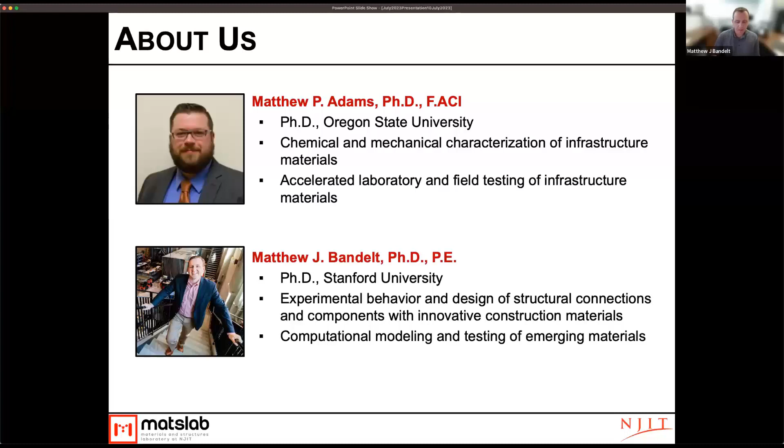Thanks, Matt. And for myself, my background is primarily in structural modeling of new construction materials, and I do that both through experimental testing as well as computational methods.

Our laboratory is located at New Jersey Institute of Technology. We have quite a bit of physical laboratory space where we do physical testing of construction materials and structural systems. We have an advanced analytical space as well, where we do material characterization work, looking at concrete and similar construction materials under the microscope for advanced analytical work. We also have additional space where we do basic mortar testing and mechanical properties testing of different systems. So this is just a brief overview of our laboratory.

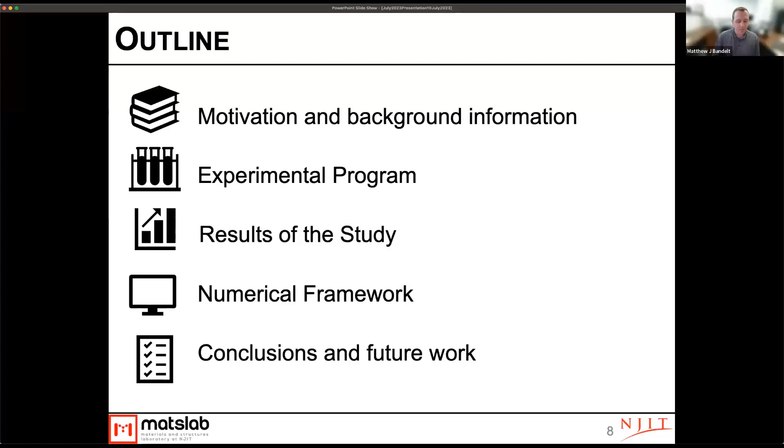The outline for today's talk: first we'll give you a background and some motivation for this project. Matt will then present the next two areas, the experimental program and the results of the study. Then I'll follow with some numerical modeling we've done that showcases the long-term durability of the materials we studied in this project. And then we'll move on to conclusions and future work.

In terms of motivation and background, if you work in the transportation sector and specifically with concrete, you're familiar with some of the durability issues that concrete materials face, predominantly corrosion, shrinkage, salt scaling, freeze thaw, among a number of others. These are a range of durability issues we face, especially here in the Northeast, due to the local climate, the large scale of these materials, the way we have to treat them, et cetera.

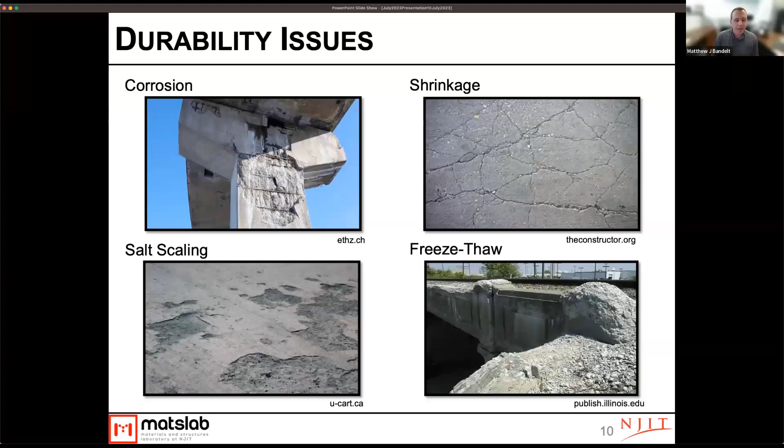All of these durability issues are in one form or another due to some sort of deterioration mechanism. If we think about drying shrinkage, for example, that happens due to moisture loss and moving water in and out of concrete. Salt scaling mechanisms are somewhat similar in the sense that de-icing salts increase the number of freeze-thaw cycles, which causes pressure to build up and local cracking and delaminations to occur.

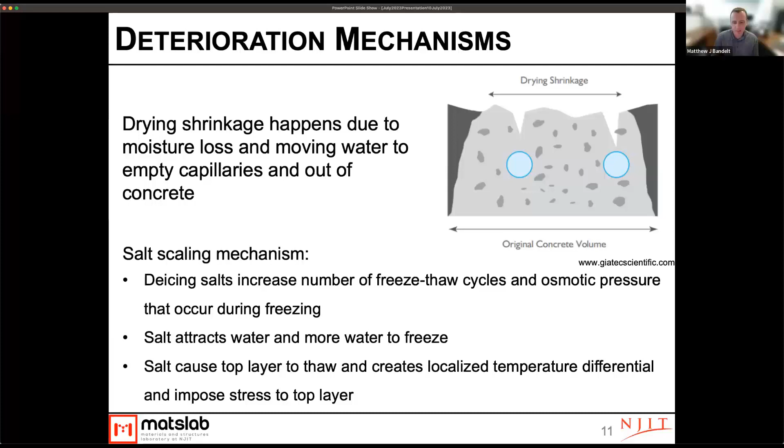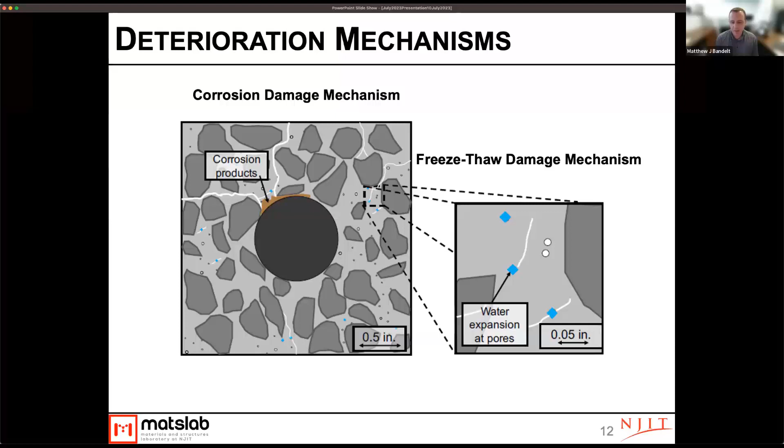If you think about the different types of deterioration we see in concrete structures, a lot of them are due to expansive stresses that build up across different scales. If corrosion products form around the surface of reinforcing steel, those products have a larger volume than the surrounding initial material, causing expansive stresses to occur. A similar phenomenon happens with freeze thaw, where water expansion within pores causes cracking at a different scale.

What we studied within our project are what I'll generally classify here as ductile concrete materials. There have been a range of these developed over the last 20 to 30 years. The most common, which a lot of people have heard of recently, is ultra high performance concrete. But there are others that different states and transportation agencies have looked at. In this project, we looked at a few different ductile concrete materials, where basically all of them exhibit some sort of either plastic or strain hardening response in direct tension. Each of these materials comes at a different cost, with different resulting mechanical properties and different durability properties as well. In compression, they generally don't spall, so you get really good confinement on the compression side too.

The names of the three materials we looked at were first, ultra high performance concrete, which has very high compressive strength and tensile strength as well. We looked at a system called engineered cementitious composites, denoted as ECC, and we also looked at a hybrid fiber reinforced concrete. I'll explain what goes into each of these systems in a second, but the point is that each of them gives you different levels of mechanical performance and durability performance, and they might suit the needs of a particular project in a different manner.

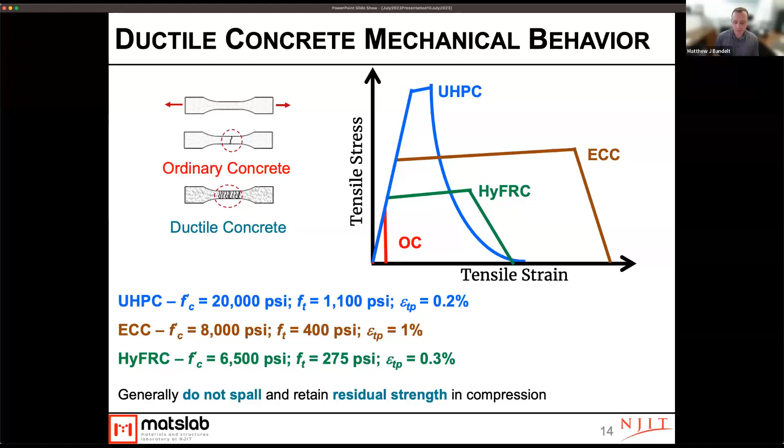So while this gives us potential improvements from a structural engineering perspective, it also gives us significant potential benefits on the durability related side as well.

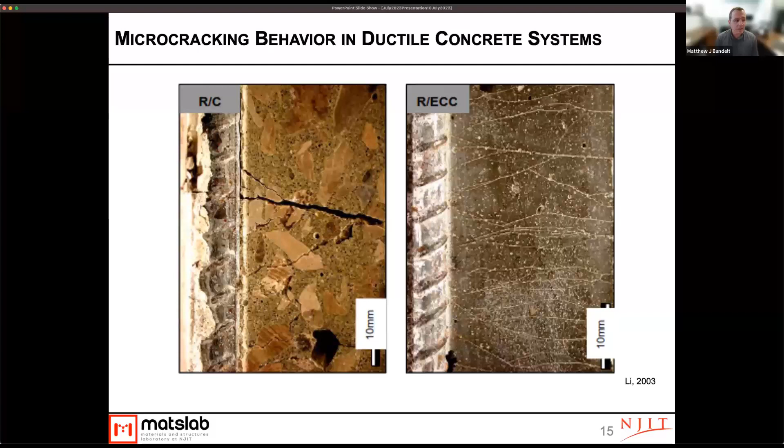The different systems that we looked at in this project were ultra high performance concrete, engineered cementitious composites, and hybrid fiber reinforced concretes. The UHPC system had a very high binder content, did not use coarse aggregate, and used steel fibers at a volume percentage of 2% by volume.

The engineered cementitious composite was a system developed primarily in Michigan by a professor at University of Michigan named Professor Victor Li. The system we looked at used polymeric fibers. It also had a mortar matrix and had 2% by volume polymeric fibers. The particular polymer we worked with were PVA fibers.

The last system we looked at was called a hybrid fiber reinforced concrete, and this has mechanical properties probably closest to a traditional concrete system in the sense that we're using coarse aggregate. This is called a hybrid system because it uses a hybridization of larger steel fibers and smaller polymeric fibers at a combined percentage of 2%. I think the steel fibers were at 1.8% and the polymeric fibers were at 0.2%. But this gives you a sense of the different systems we were looking at.

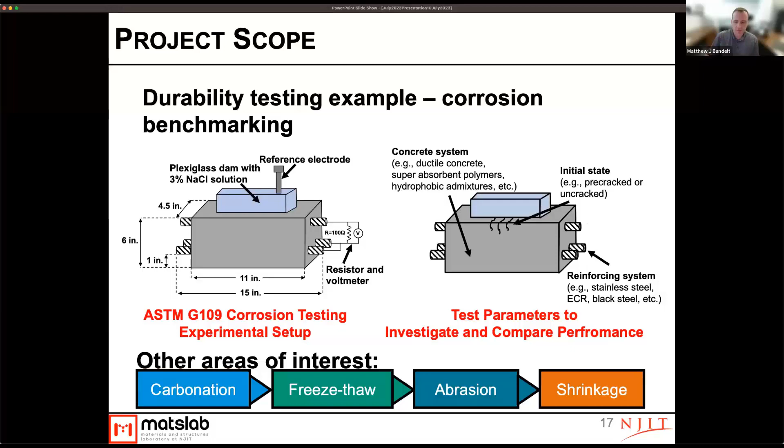Some other areas of interest we looked at were: if you were to place one of these materials in a bridge deck, what would be the long-term durability performance? The way we did that was using a numerical modeling system combining the effects of both mechanical cracking behavior and chloride ingress and corrosion. We'll walk through that numerical simulation framework and some specific examples.

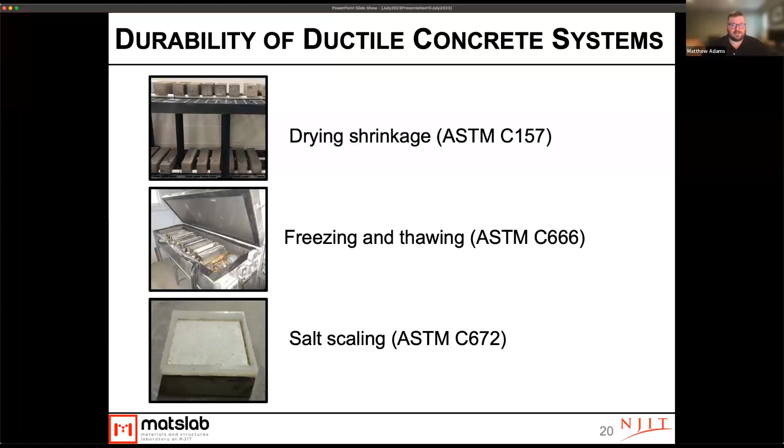So, like we said, I'm going to talk about our experimental program a bit. We looked at a range of durability tests to try to benchmark the difference between these 3 different materials and some existing mixtures used by NJDOT. So we looked at drying shrinkage, freezing and thawing, and salt scaling of these systems.

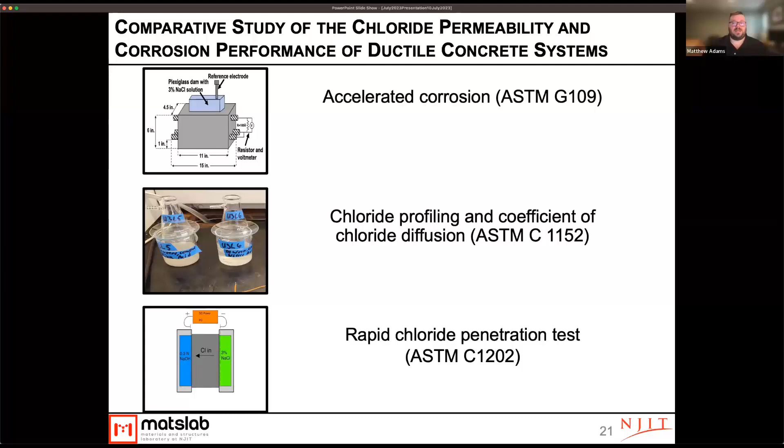We also did a range of tests to look at the corrosion performance of these systems. We did some accelerated corrosion testing through the ASTM G109 test, chloride profiling to measure the coefficient of chloride diffusion, and the rapid chloride penetration test. This is a quick test method used as a surrogate for how quickly salts can penetrate through concrete to reach steel. However, it's well designed for ordinary concrete, but there are questions about its applicability for some of these more ductile systems. We'll talk about all of these moving forward.

For our concrete materials, we used 2 ordinary concrete systems: a self-consolidating concrete and a high-performance concrete. These were both based off standard mixture designs used here in New Jersey. We also used 3 ductile concrete systems: the ECC, HyFRC, and UHPC.

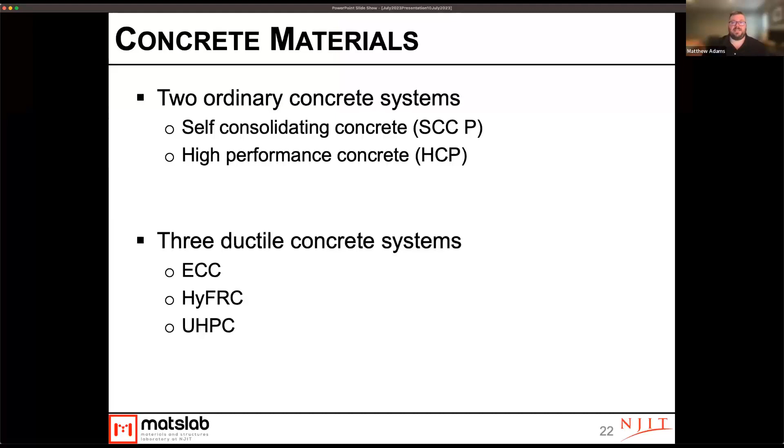We also looked at 5 different types of reinforcement materials in the G109 test. And we also took a set of epoxy-coated reinforcement and pre-damaged them by breaking off a bit of the epoxy coating, to simulate the performance of those materials in the field, where epoxy coating, while it works great when it stays on, is a little more prone to damage, which can really impact performance.

So here are our results from this study. First, I want to talk about some of our fresh and hardened properties and the air content. Our strengths were all in relatively the same area for everything except the UHPC. The UHPC was a bagged product we got from Lafarge, and that strength was up above 20,000 PSI, but everything else was in the 5,000 to 8,000 PSI range. So you can really see the big difference in the compressive strength of those systems.

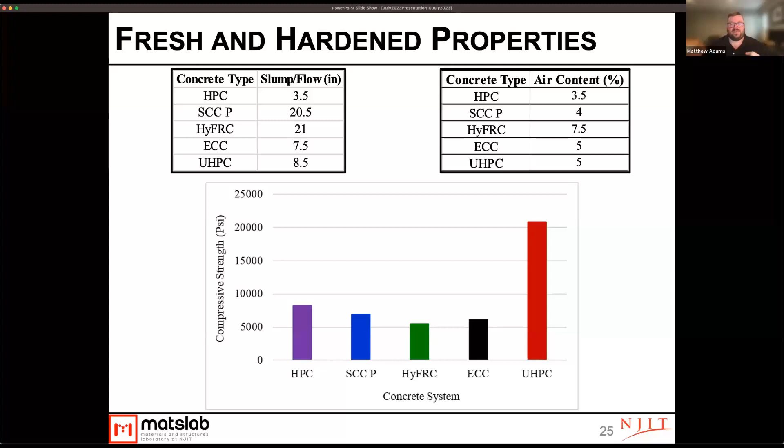The big thing I want to note here is, particularly for the HPC and SCC, we had relatively low air contents. We really had trouble air entraining these mixtures in the lab. If you're familiar with labcrete versus field concrete, air entrainment is really a bear to get right in the lab. Unfortunately this was done during COVID, and we should have switched to a different air entrainer to get better air entrainment, but procuring materials during the height of COVID was basically impossible most of the time. So keep those air contents in mind, because they do affect some of our results, and we hope to someday rerun some of these tests for freeze-thaw damage.

So first, let's talk about drying shrinkage. Of course, for drying shrinkage you take a bar of concrete, place it after curing into a drying environment, and measure its length as it loses water, which gives you an idea of the shrinkage. In this test, the UHPC had the lowest shrinkage, while the HyFRC and ECC both had the highest levels of shrinkage, and the ordinary concrete was in between.

So what we can see here is that these ductile concretes do tend to have a little more shrinkage, except for the UHPC. But one thing to note is that even though those levels of shrinkage are higher, generally due to the high cement contents, the test method we used, ASTM C157, does not necessarily measure cracking propensity - it's just measuring free shrinkage, with no restraint in the system. Other research has shown that these ductile concretes, while they shrink a bit more, also tend to crack less because of the fiber content.

And in this test method, the UHPC showed the lowest drying shrinkage. But this test method also doesn't capture autogenous shrinkage, which is typically a bigger shrinkage issue for UHPC than drying shrinkage is.

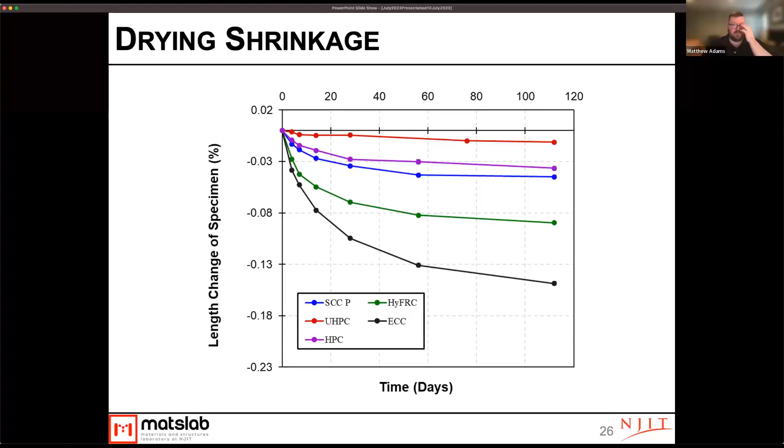But of course, when you use those fibers, you'll hold everything together, so you could get less ingress.

For freeze-thaw, our two ordinary concrete systems, the SCCP and the HPC, both failed fairly early on. But again, with those systems we had a lot of trouble getting air entraining in, so this makes sense—the air entrainment was really quite low for those. The HyFRC also failed despite having 7.5% air content, which shows that HyFRC may not be the best choice in freeze-thaw applications.

That may have to do with the certain systems in there, and the different fibers causing more expansion during freeze-thaw, maybe allowing water to get into places that don't have access to the air entrainment. More research really needs to be done to understand why that HyFRC system performed that way. But we do see that the ECC and UHPC, both with moderate levels of air entrainment, only 5%, both performed really well.

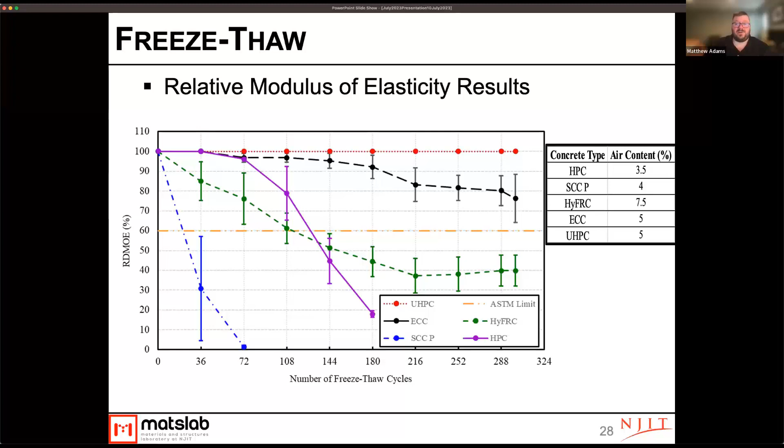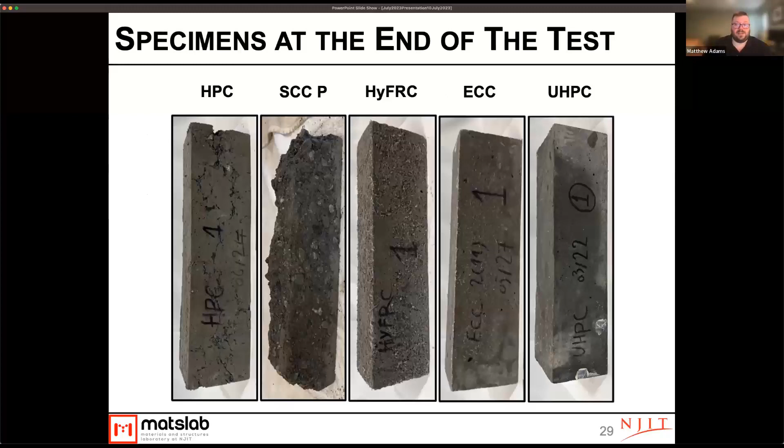So what we know is that our ordinary concrete was difficult to air entrain. Likely these results show that if you don't get enough air entrainment in there, you're definitely not going to get good freeze-thaw performance. Even though that HyFRC did perform poorly, we need to take a look at that a little bit more, but some encouraging results with the ECC and UHPC.

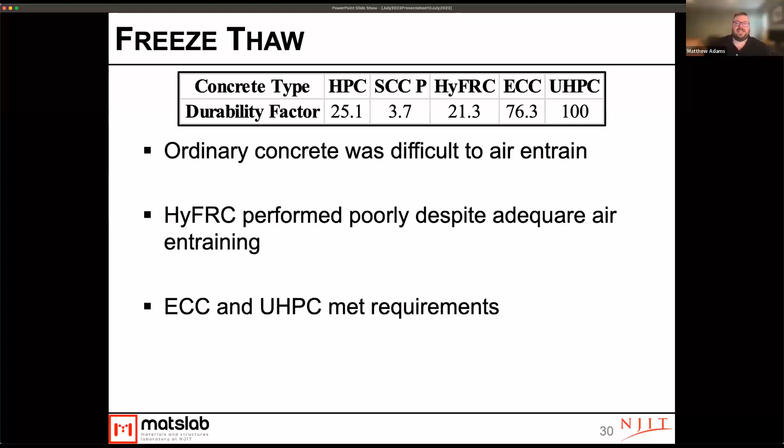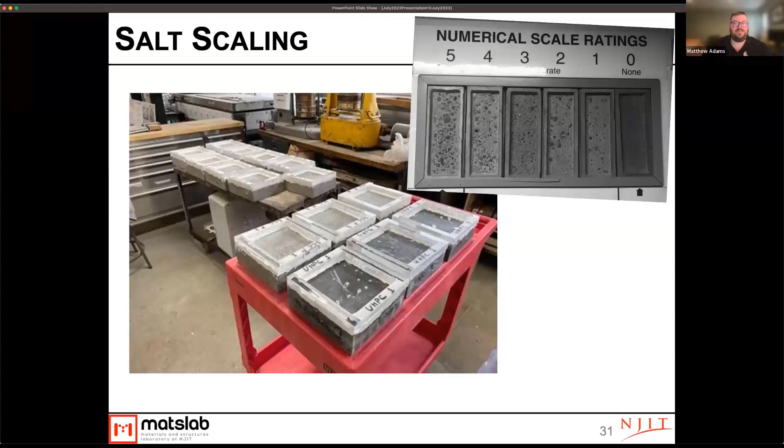Salt scaling is the third of the non-corrosion durability tests we looked at. For this test method, you take a small concrete slab, put a dam around it, and pond it with a chloride solution. This is more of a qualitative test—you look at the damage to the surface over time to determine its resistance to salt scaling.

What we saw was that the SCCP and the HyFRC both had the worst performance in terms of salt scaling. The HPC and ECC both had around a rating of 1, which is good, and the UHPC had essentially no damage noticed on it. Here's what the different samples look like over time.

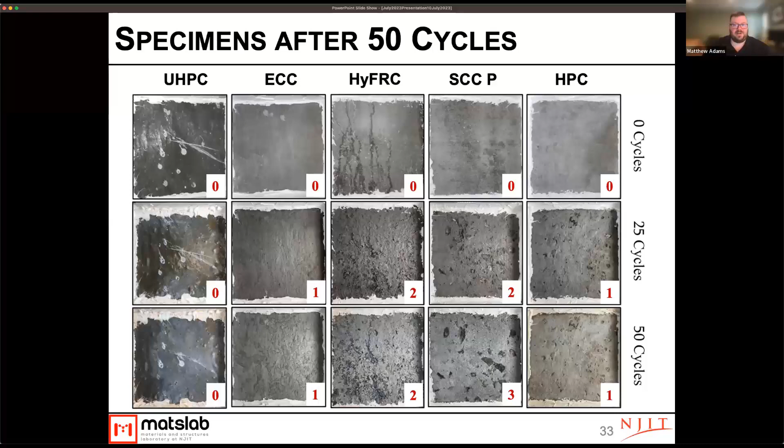Once you get out to 50 cycles—meaning you've put those chlorides on there and actually frozen and thawed it 50 times with that ponding—you can start to see that surface damage build up. Particularly on the normal concrete, you typically get those pocks in the surface. That's very standard damage with salt scaling.

But one thing we noticed with the systems that had fibers is that the fibers tended to hold material on the surface. The test method doesn't actually request that you brush or clean the surface off—you're just supposed to rinse the waste material off and then look at the surface. However, that doesn't really give you a full picture of the damage you're seeing in those slabs.

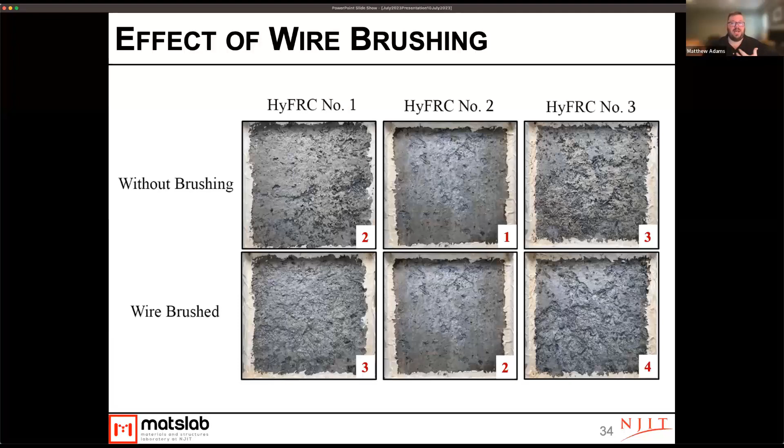So we recommend that if you are testing these fiber reinforced systems in salt scaling, you do a light wire brushing of the surface to clean off some of those materials stuck on with the fibers, because they may actually be a trip or skid hazard, particularly for walkers, if they're stuck on there but not really tightly held.

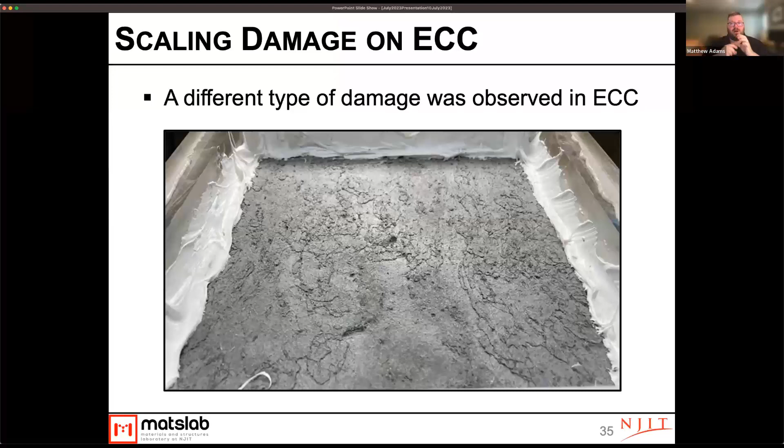On the ECC system, we actually noticed a slightly different type of damage. Instead of small pocks, we got sort of larger delaminations. This is likely due to the density of the fibers in that system holding those surface pieces together, so you get thin delaminations across a larger area rather than small individual pocks coming off.

So the takeaways of our durability testing: UHPC across the board had the best performance. In general, the ductile concrete systems had improved durability, though the HyFRC was a little bit questionable.

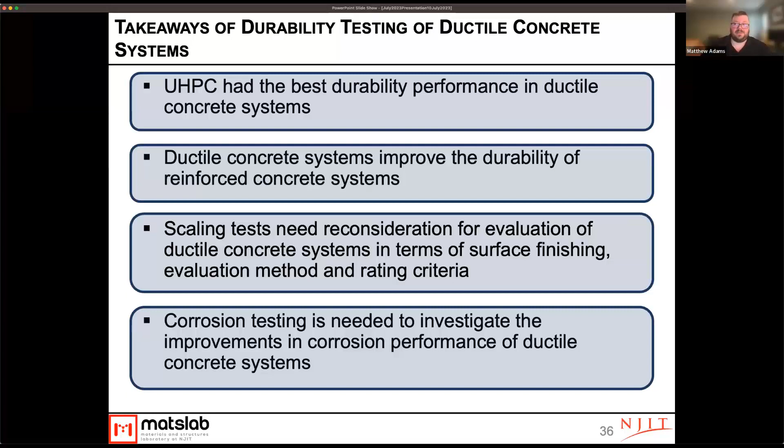And we have some testing method modifications that need to be considered when we're looking at these ductile fiber reinforced systems. So next, I want to get into the corrosion testing.

One of the first things we started running were these G109 corrosion tests, and Matt talked about this a little bit. This is essentially an accelerated corrosion test where you apply a dam at the top of a reinforced prism. In that dam, you have a chloride solution that you put on for 2 weeks at a time, allowing it to stay wet and then drying it. This helps accelerate the rate at which those chlorides move into the system.

Then we measure the corrosion current density along the rebar, which tells us when corrosion has likely occurred. The normal test method does not have you apply any preloading to develop cracks. However, with these ductile systems, and even with normal concrete, you often don't see any damage, as you'll see from our results over a year, even 2 or 3 years time.

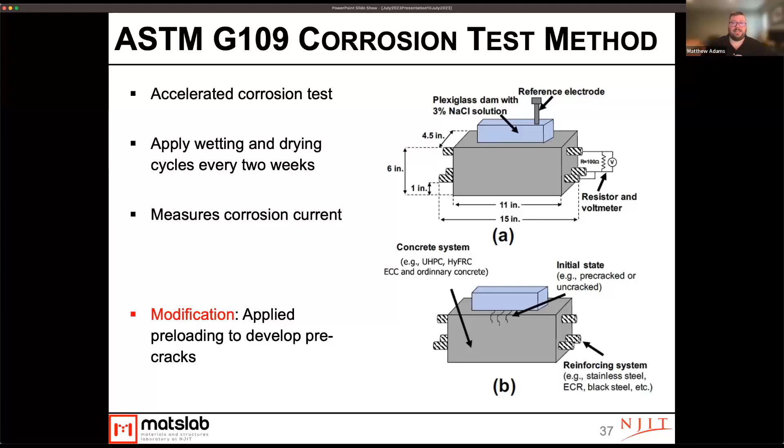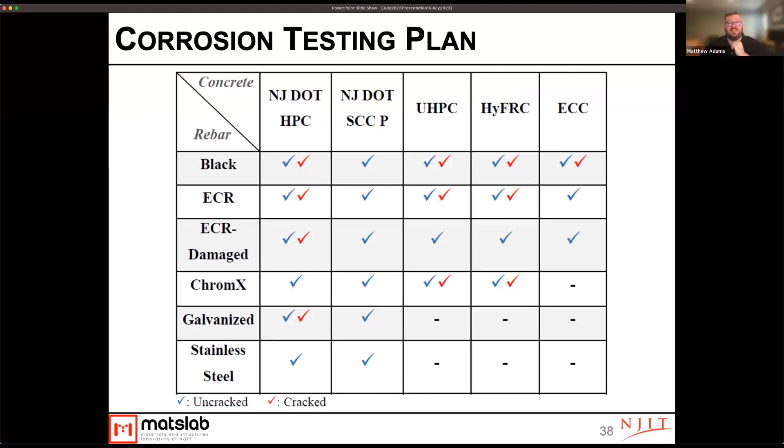So to try to accelerate that and show more realistic field situations where you have some initial pre-cracking, either from loading or shrinkage, we looked at a modified version where we pre-cracked the systems. We examined this across all 5 of our concrete mixtures and across different rebar types, including some damaged epoxy coated rebar. All of our systems we did in an uncracked state, and some we did in a cracked state as well, to examine the role of cracking.

What we noticed is that across the board on our uncracked specimens, up to 700 days, about 2 years, we have not seen corrosion begin on any of these samples. We're still monitoring these; they're still in the lab. This is why this test method tends to be a little slower, it certainly was longer than the project before we're going to see anything. This is why it was important for us to look at some cracked specimens.

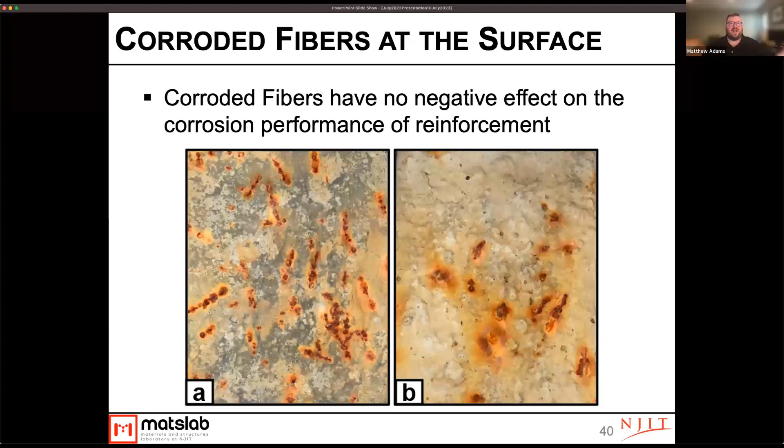We do see some corrosion in the fibers, the metal fibers at the surface. This is typical. However, this doesn't necessarily mean that corrosion has moved through the system—these are just fibers that were already exposed at the surface.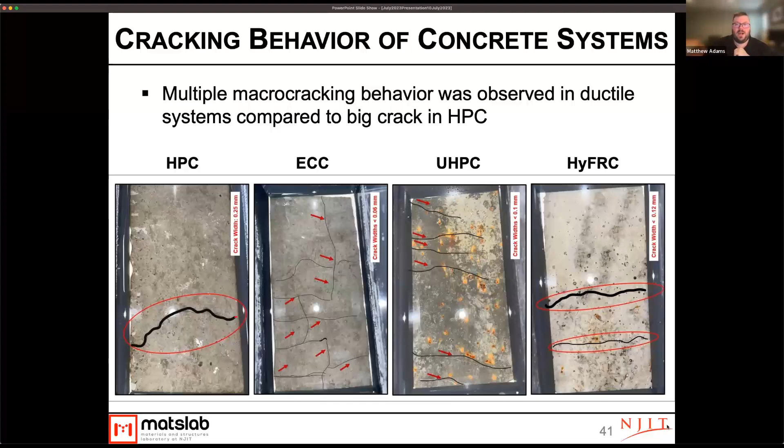And then these are our systems after we cracked them. You can see for the HPC system, we get one large crack, whereas for the ductile concretes, we tend to get a more distributed cracking pattern with smaller cracks.

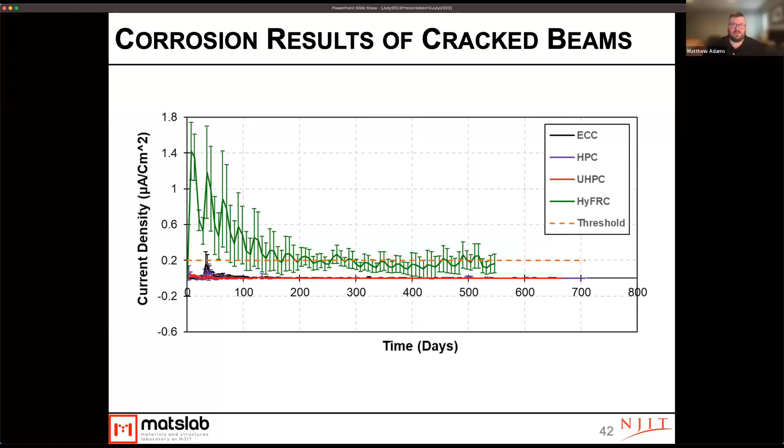What we see here is that above that orange dashed line typically means corrosion may have occurred—if our corrosion current density is above that, corrosion is likely to have started. The only system that we started to see corrosion in our cracked beams, out to 700 days, was the HyFRC system. We actually had to stop that test just after 500 days. But we did see that corrosion was likely to have started in the HyFRC system. Even our HPC system, the normal concrete, which is a standard mix used by the New Jersey DOT, is performing quite well in terms of corrosion performance.

What we see here in particular is that one of the three specimens had a higher corrosion density than the other two, and this was the one with the largest crack in it as well.

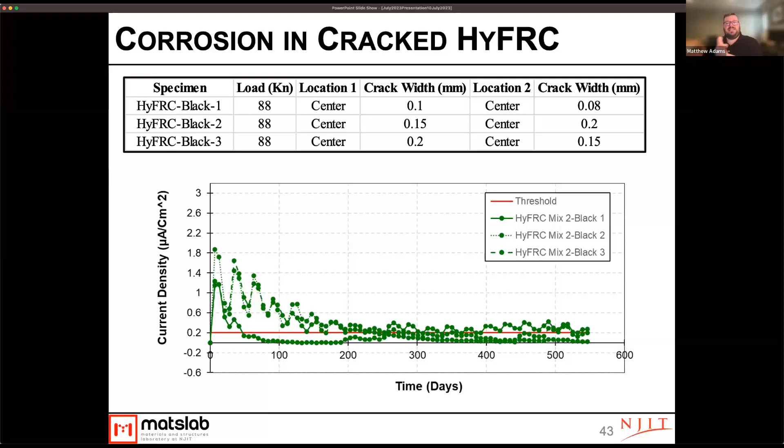We also see some higher corrosion density early on. This is an artifact of the test method—as the system saturates with water over time, at early age you tend to see some higher corrosion density. But what we're really concerned with is the long-term corrosion density.

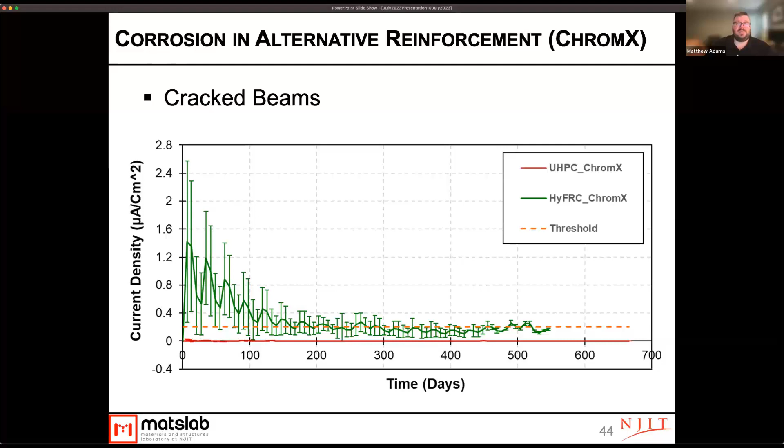For our alternative reinforcements, we see that again the HyFRC, even with the ChromX rebar, had a corrosion density above the limit there, so likely even that ChromX was starting to corrode. Again, that was a system with a fairly large crack. But in our other cracked beams with alternative reinforcement, we still weren't seeing any corrosion.

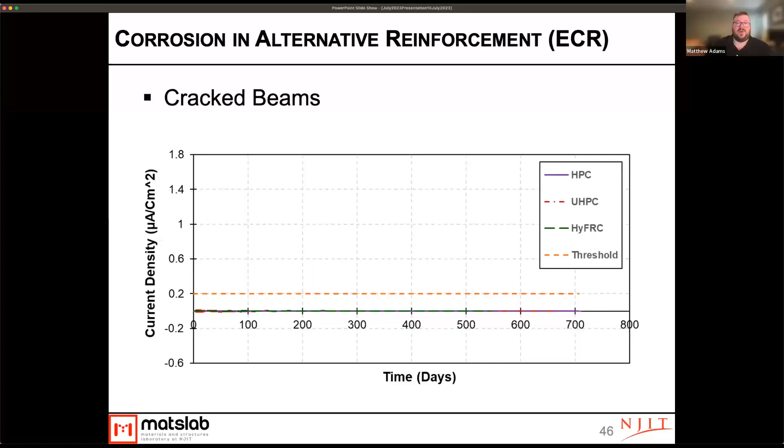We also did some chloride profile measurements. Basically what this is showing us is the depth of the concrete along the x-axis and the amount of chloride by mass of concrete along the y-axis. As you go deeper, you tend to get less chloride in that system because it takes longer for those chlorides to get down to that depth.

This was done at a year of ponding in that G109 test. With the UHPC system, those chlorides got basically nowhere. There was a little bit on the surface, but once you get about 2 or 3 millimeters deep, we had no chlorides. The ECC system had a much higher chloride rate early on, but it quickly dives off. Our rebar was at 25 millimeters, so really only the HyFRC was close to having measurable chlorides at that level.

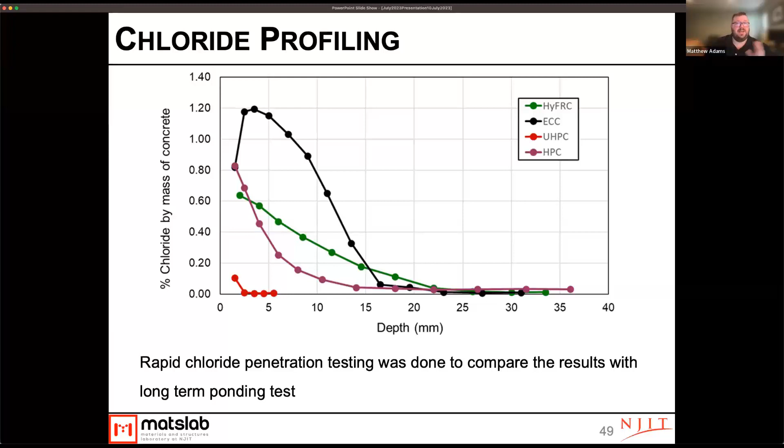So really all of these systems were performing well, though for bang for your buck, the HPC and the HyFRC, or the ECC, were performing the best in terms of the depth where we had our rebar. The UHPC, again, performed the best, but is also quite a bit more expensive.

One thing we wanted to take a look at is the rapid chloride penetration test. As I mentioned, this is a test that's often used because it's quick. Typically what we look at is the amount of charge that gets passed across a concrete sample, and that's related to how likely it is that chlorides will move through that system in a way to cause corrosion.

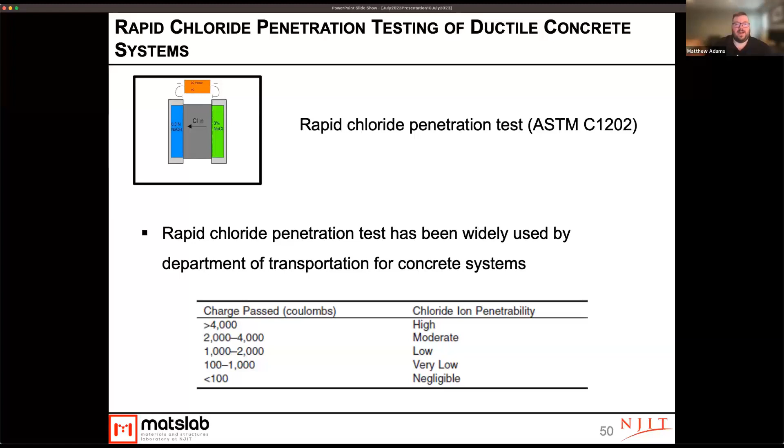Once you're getting above about 2,000 coulombs passed, that's when you really need to start worrying about corrosion possibly happening in your system at an early age. So one thing we looked at was whether using the fibers in these mixtures would impact the test method. Remember, this test method isn't actually passing chlorides through the system, it's just passing charge. Electrons are much smaller than full chloride ions, so it's just a surrogate test, not an exact measurement.

That relationship has been established quite well with ordinary concrete, so it's a great test to use on HPC and SCC mixtures. For our systems with fibers, it may not actually work well, and the cementitious microstructural system is also different.

So what we do see is that our systems with fibers, particularly the ECC, had a fairly high charge passed with the fibers, and even with the UHPC, we see about 10 times the charge passed than when we didn't have fibers. The HyFRC system, which has metal fibers in it as well, we couldn't even get a read on it because it was passing so much charge through that network of metal fibers.

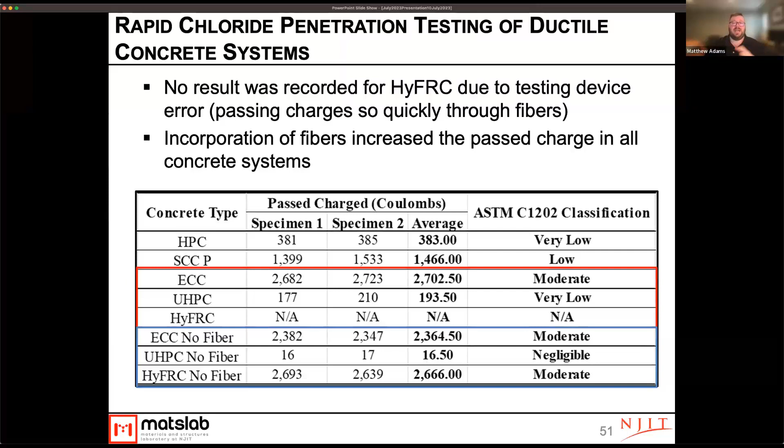With the HyFRC, you absolutely cannot use this test method for measuring chloride performance with the fibers in it. However, both the ECC and HyFRC showed fairly high charges passed, above 2,000 coulombs, but that doesn't match well with our profiling testing and our G109 testing. So it's pretty clear the RCPT test is not really a great measure of chloride performance with these ductile concrete systems. More understanding is needed to recalibrate that test method.

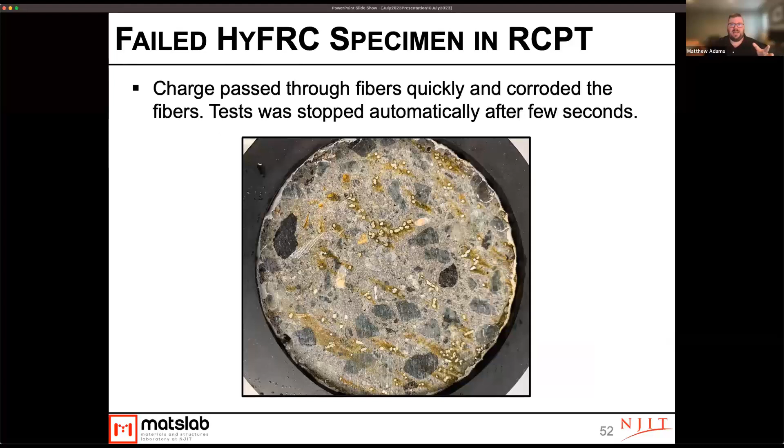Here you can see the HyFRC system with the fibers still installed, and those fibers have basically corroded in that test method, which is only about 6 hours long. It started to corrode them immediately, and we basically had to stop the test after a few seconds because so much charge was being passed in that system.

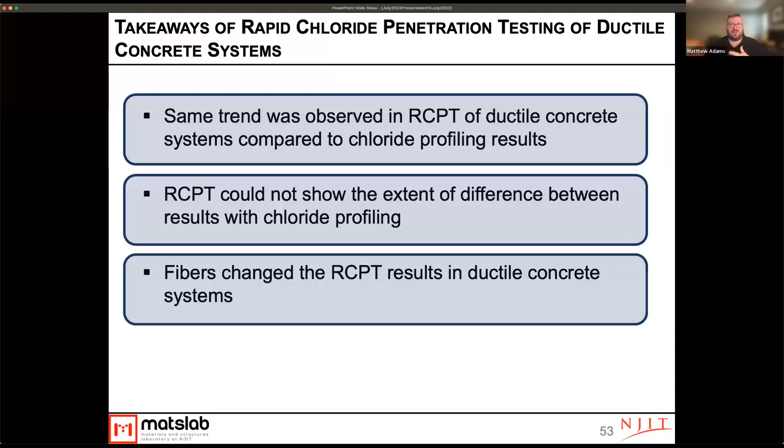So in general, we did see the same trends, but the fibers can have an impact, and we really need to understand these systems long-term to get more information on how RCPT can be used.

Basically, there are two ways to evaluate service life. There's an experimental way, which is some of the things that Matt just talked about. When we use experimental methods, we can get accurate results, and they're fairly intuitive. You can figure out why something went wrong, what might be the cause, et cetera.

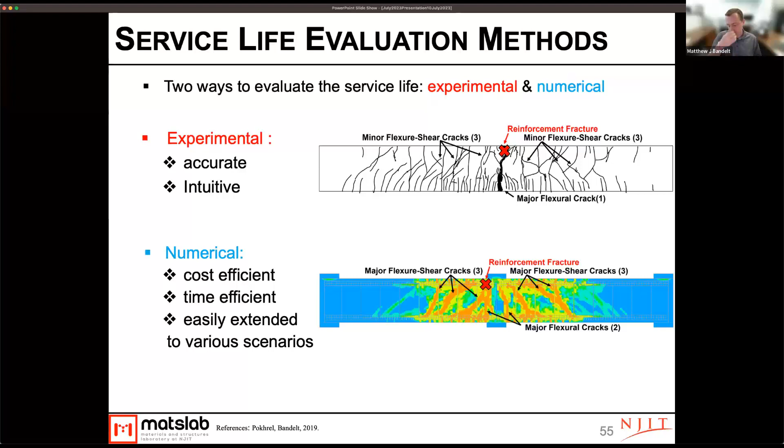And then there's a numerical framework as well. Here I'm showing a structural test on top of something that was physically tested versus numerically simulated. A numerical simulation has advantages and disadvantages. It's cost efficient, since we don't have to actually procure the materials we're using. It's time efficient, once a simulation is set up, we can simulate mechanical loading or durability conditioning in a much smaller time frame. And it's easily extended to various scenarios, we can move loads around, or think about different boundary conditions for temperature cycling, chloride exposure, or whatever it might be.

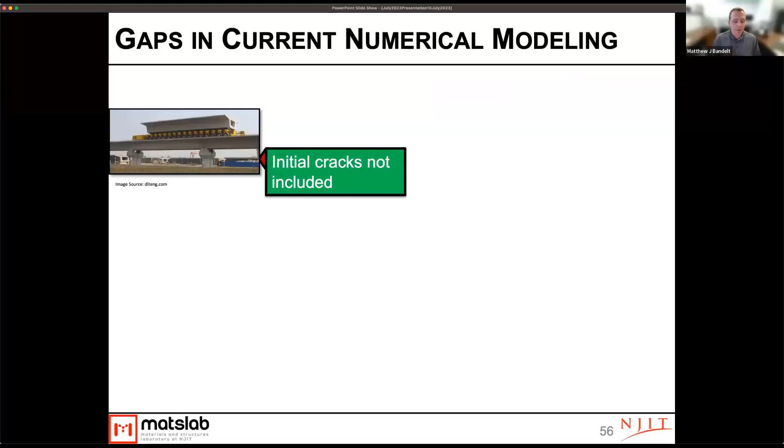But there are some gaps in current numerical modeling. Oftentimes our numerical methods don't include the effects of cracking, and here I'm particularly talking about simulating deterioration. Often that's done without considering the effects of cracking. Sometimes we also don't simulate boundary conditions properly, or they're not updated on a regular basis.

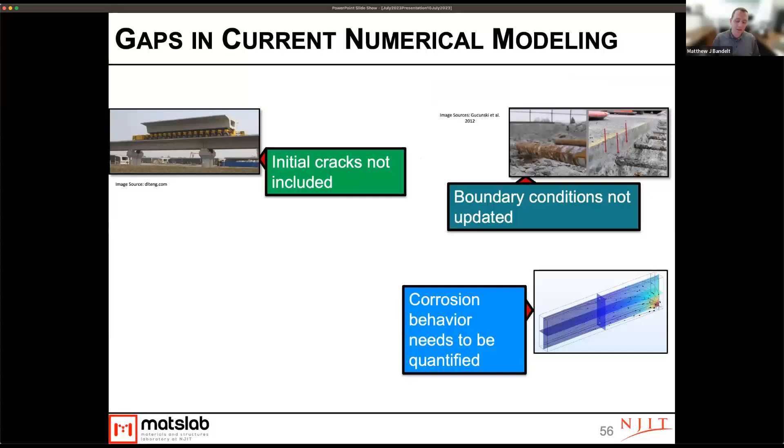One thing we would like to be able to do with numerical methods is combine the effects of mechanical loading with being able to simulate, say, corrosion behavior or some other phenomenon. Oftentimes the big gap is that structural deterioration is not coupled with the environmental conditioning and the resulting deterioration that we see.

So what we set out to do was combine these things and develop a framework that allowed us to simulate both mechanical damage and durability damage in a combined framework. We applied it specifically to one type of material and looked at a case study example so you could see what might be the long-term performance of a bridge deck made of two different types of systems.

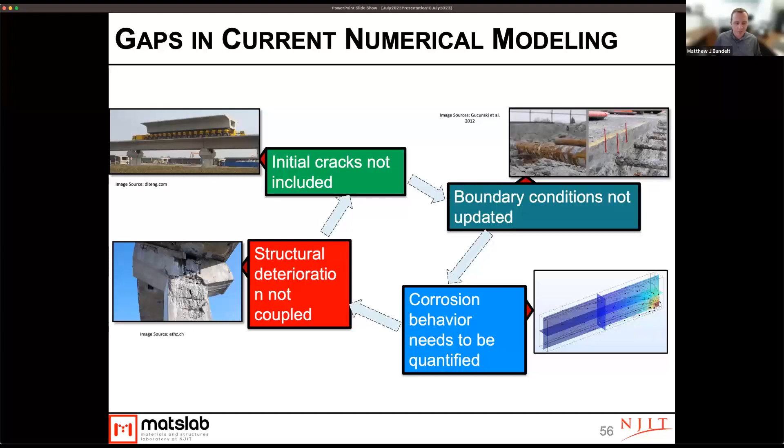Once again, testing and simulation standards often treat each form of damage in isolation. For example, we often think of a truck driving over a bridge deck, and maybe over a long time you get some fatigue cracking or whatever it might be. Then we think of corrosion mechanisms or freeze-thaw or whatever durability issue we might have as another isolated manner.

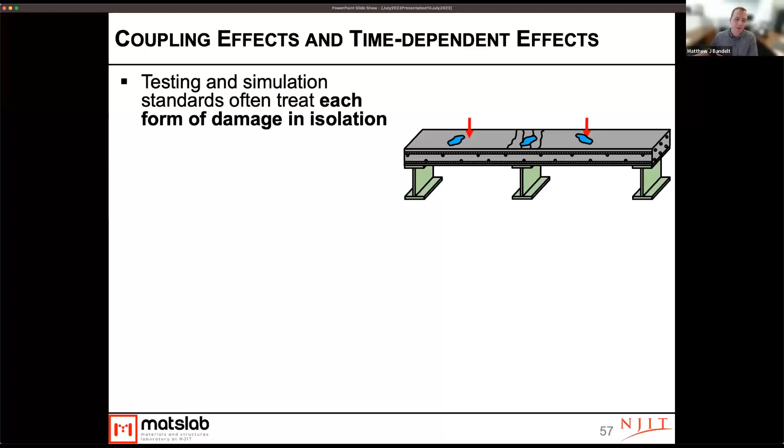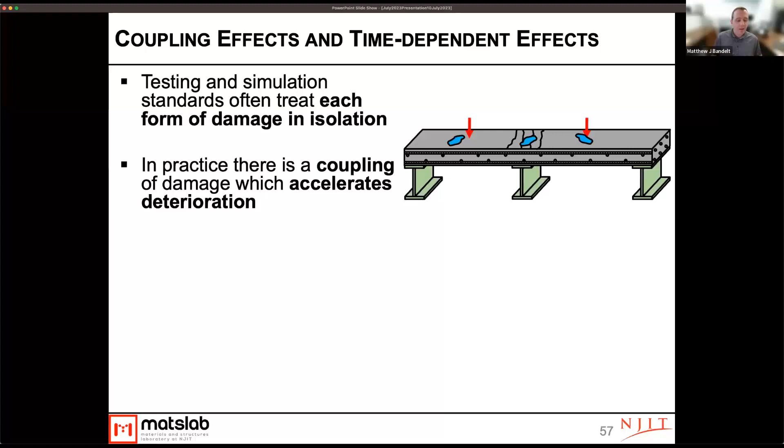But we know that there's coupling that happens, and Matt went through some of the chloride profiles of cracked specimens. What you could see was, in the cracked specimens, there was the propensity for some of this corrosion to potentially occur, whereas in uncracked specimens in the same time frame, we never saw that. So the benefits of some of these new concrete materials might be more apparent when we study the coupled forms of deterioration. We also have to think about the fact that boundary conditions are time dependent and not stationary.

So what we did was once again set out to develop this numerical framework that would allow us to think about these things in a holistic manner, so we could get a sense of how things might behave in a time frame that we can't necessarily simulate within a 2 to 3 year funded research project in an experimental laboratory. So we use numerical tools to help us with that.

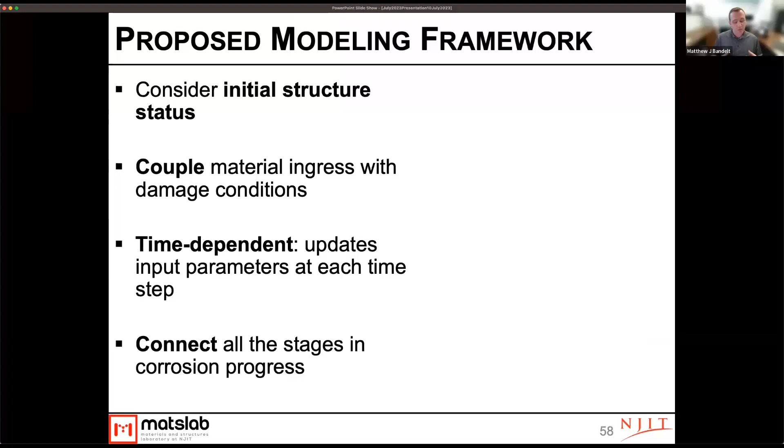So we developed a modeling framework where we considered the initial structural status. We coupled material ingress with damage conditions. It was time dependent, so parameters were updated at each time step. And then we connected all stages in the corrosion process. Through this, we looked at structural response, material ingress, and the electrochemical reactions as well.

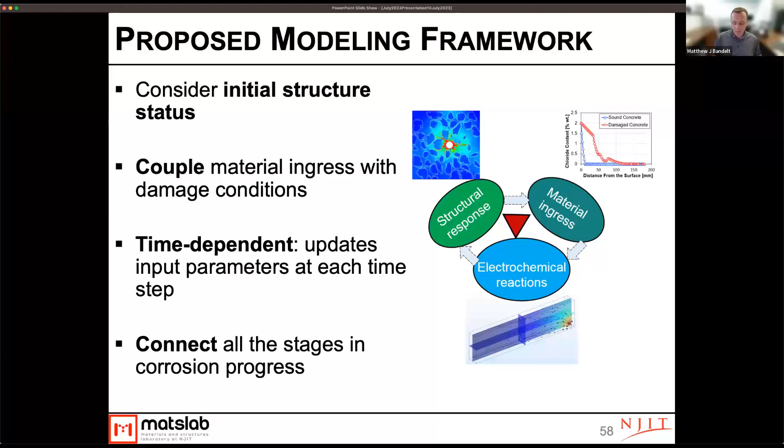This involved using three pieces of software. We used a structural mechanics software in our research group called Diana, similar to ANSYS or Abaqus or any other structural mechanics software. We use it because it has really good concrete mechanical material models that allow us to simulate damage quite nicely. What we did is, if we were to load something up and then wanted to simulate the chloride penetration happening at some particular time, we used MATLAB to connect our Diana software to a program called COMSOL. This COMSOL software does multi-physics modeling that allows us to simulate the chloride ingress.

That requires some input parameters, such as chloride diffusion coefficients, that we took from our experimental testing. Based on the chloride diffusion that we have, we can figure out has depassivation occurred, and if so, are we going to go into a corrosion analysis? Then that corrosion analysis, when corrosion products form, those products cause volume expansion, which leads to cracking.

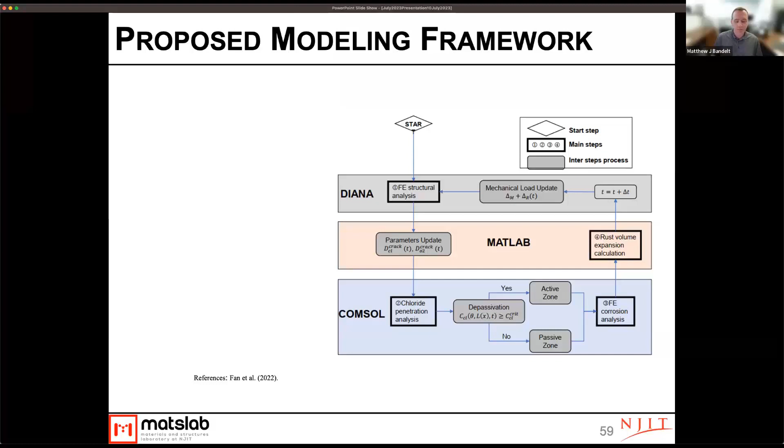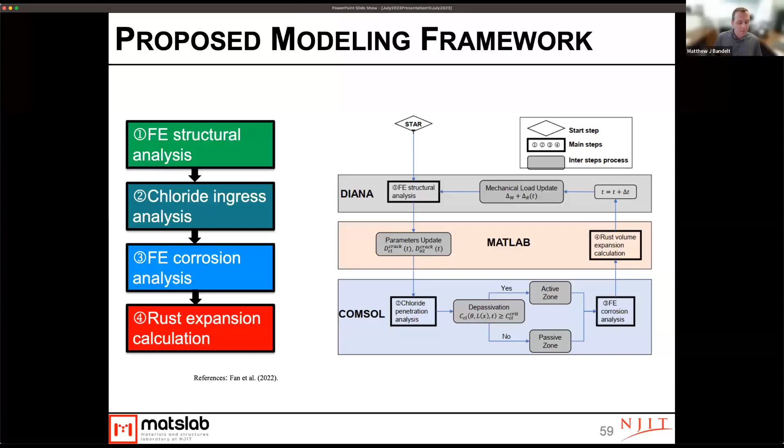What we were able to do was link these pieces of software and simulate a fully time-dependent behavior, from initial structural mechanics to chloride penetration to corrosion analysis, which causes expansion and additional cracking, etc. We were able to look at the time-dependent behavior of different samples. So these were the main steps: structural analysis, chloride ingress analysis, corrosion analysis, and then simulating the rust expansion calculation and repeating this over time.

So what we did is we took a representative bridge deck and made comparisons of a bridge deck made of traditional reinforced concrete materials and one made of UHPC. When we did this, we took in mechanical properties and durability properties as our input parameters, developed from both experimental testing we did and some of the results that Matt showed. We were able to simulate it over a much longer time frame than what we could simulate in our laboratory conditions, and we tried to subject that to realistic environmental conditions in New Jersey.

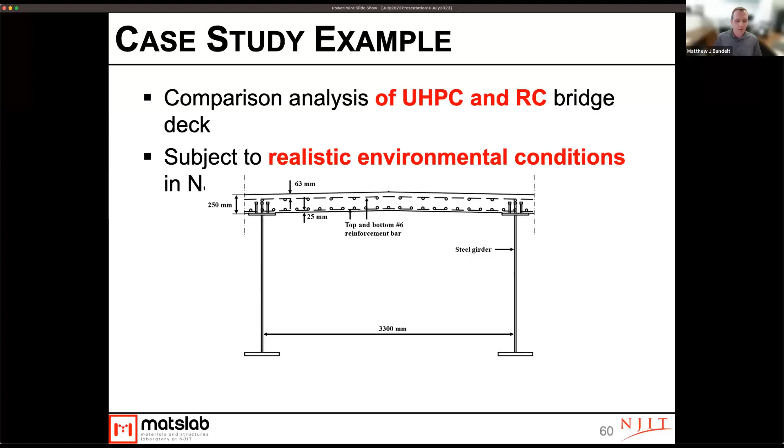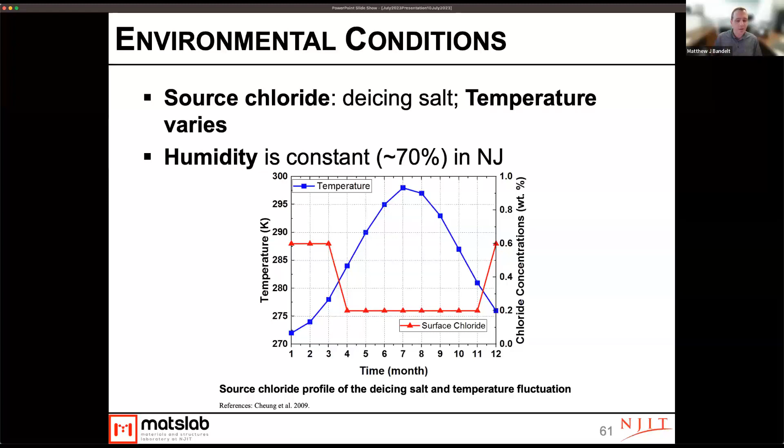We had a chloride source from de-icing salts, and we looked at temperature variations. New Jersey has a relatively constant humidity compared to other environments, especially compared to what we could simulate in the laboratory. So what we applied to our computational model were simulations of chloride exposure in certain months, and temperature swings over the course of a year. We repeated this for basically decades in our computer model to simulate how long it might take to see chlorides at different thresholds, or what the corrosion might look like at different points in time.

So what we have here is basically a bridge deck. We're modeling a small portion of it, and we apply some loads to it. The main thing to note is that for our concrete, we assumed a larger thickness than we would for UHPC, or said the other way, if we were using one of these UHPC solutions, we might be able to take advantage of its high mechanical properties and use a smaller section thickness to result in equivalent strength. And so that's what we did.

We designed these to have equivalent strengths. They'll wind up having different stiffnesses because of different thicknesses, but the strengths were the same. We exposed them to some mechanical loading, and loaded it up - this is a simulation of the load displacement behavior of the reinforced concrete and reinforced UHPC. We loaded it up to get us to a representative service load, taking it to the same applied external load. For our reinforced concrete, the crack width at that point was 0.2 millimeters, whereas with the UHPC it was about 1/10th the size, despite having the smaller section thickness and smaller amount of cover as well.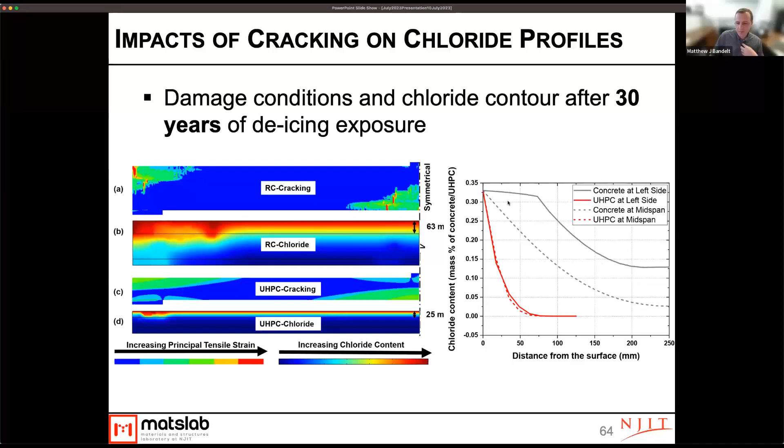The other thing we can look at in figure B and D are the chloride levels we see in the different systems. After 30 years of exposure, there's significantly higher chloride in the reinforced concrete member compared to the UHPC, despite it additionally having the smaller depth. Much like we looked at chloride at various depths from our experimental specimens about 20 minutes ago, we can simulate the same sorts of things in a representative bridge deck and look at how much chloride we might expect an inch down into a member in one of these UHPC systems versus concrete after 30 years of exposure.

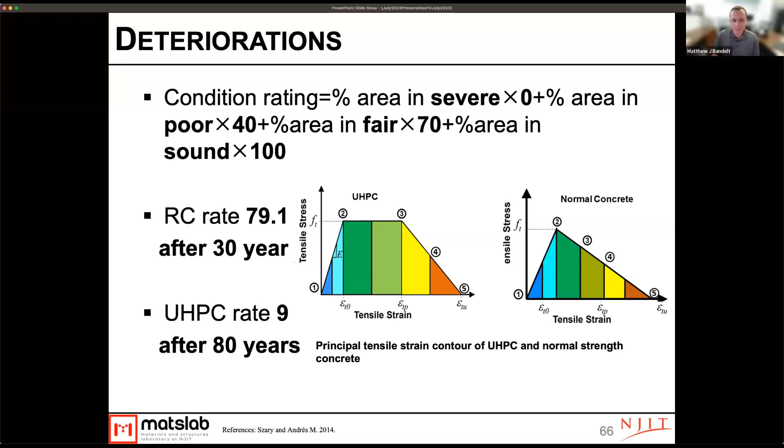So some takeaways from the numerical modeling framework. First, the multi-physics numerical approach gives us an effective way in predicting service life evaluations. The UHPC bridge deck had slower deterioration, and a companion study that our colleague Hao Wang helped us with, that we didn't get into the results here, showed that when you look at actual dollars to it, UHPC was a cost-effective solution compared to the RC system in a 50-year service life. That's in our actual technical report, but not within this presentation, just due to the time constraints.

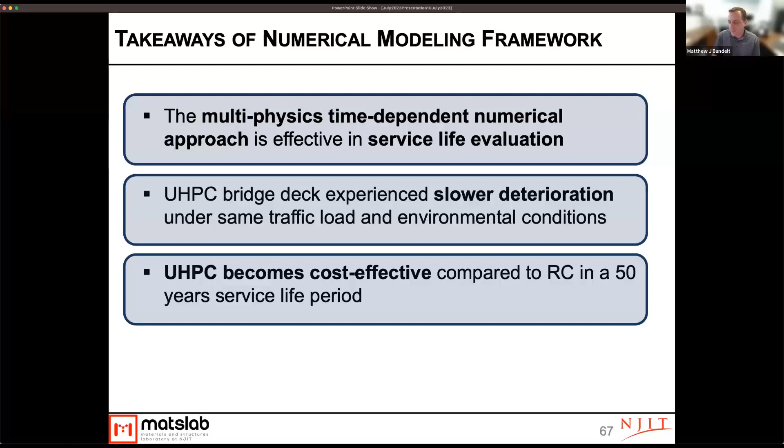So now what I'll do is I'll summarize with some conclusions and things that we hope to work on in the future based on this study.

In general, UHPC had the best durability performance that we saw of all the ductile concrete systems. That's somewhat to be expected given the high upfront cost and the high mechanical properties that we have as well. In some of the fiber reinforced systems, there's high cementitious material content, and that resulted in increased drying shrinkage. But those fibers helped improve durability performance across a range of different metrics.

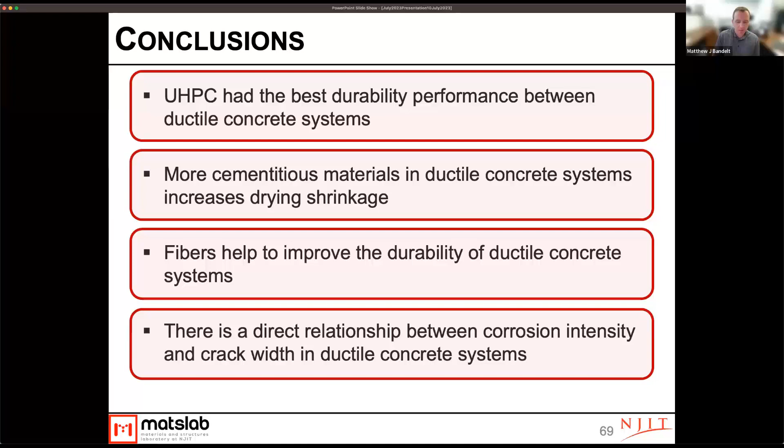And we obviously saw a direct relationship between corrosion intensity and crack width in the ductile concrete systems.

So another big thing that came out of this study was just some of the considerations that one must take when using some of these newer concrete materials and the test methods that go along with them. For example, we saw how the fibers influenced RCPT results, and why those might not be the best test method. Matt had also gone into some issues with salt scaling, et cetera. And our multi-physics numerical approach gave us some interesting information on service life performance as well.

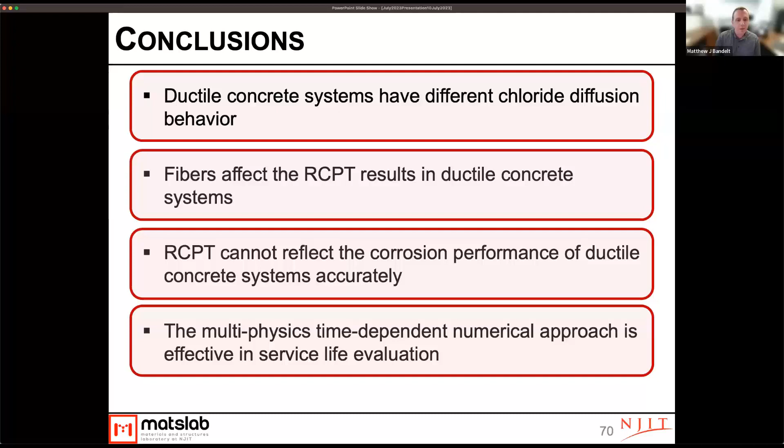So there's lots of different recommendations that we have. In terms of testing corrosion behavior in these ductile concrete systems, looking at specimen size, changing the cracking method, brine solution, cover depth, different ways to measure, et cetera. These are all things that we think should be considered when evaluating these systems.

With looking at the salt scaling tests, and using these ductile fiber reinforced concretes, thinking about surface finishing and surface evaluation and what rating criteria should be used is definitely something to consider as well.

In terms of future work, there's some ideas that we have regarding RCPT results and how those should be interpreted in the ductile concrete systems. Should we consider cracking or not, or just in its initial state? Salt scaling is another issue with the ductile concrete systems, and how you properly prepare the specimens, and then investigating the applicability of resistivity testing in these ductile concrete systems.

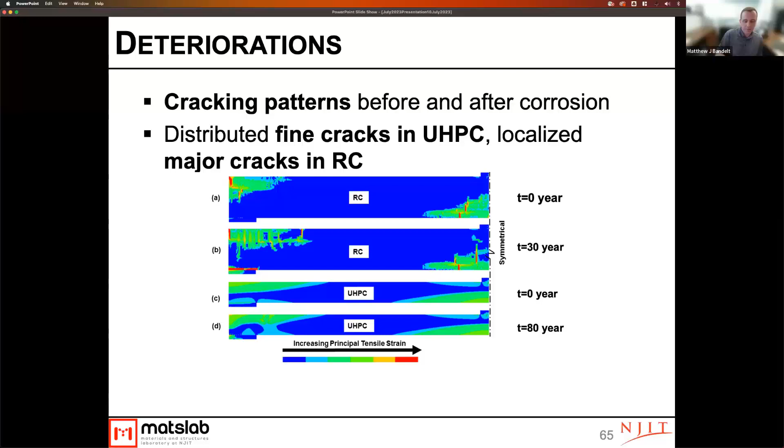And what we did is we counted up areas that were in different sections, like blue and light blue, green and light green, yellow, red, etc. Based on the percent area that we saw in our section that was severely damaged, slightly damaged, or had no damage at all, that area would get multiplied by basically 0% for severe, 40% for something in a poor category, 70% for something in fair, etc. This was a method effectively proposed by Pat Szary and Andres Rhoda.

But we did this in a numerical framework as opposed to counting area that you might see on an actual bridge deck. For the reinforced concrete, what we saw was a rating of 79.1% after 30 years, whereas the UHPC was above 90% after an 80-year time frame. So hopefully that answers a little bit of the method that was used.

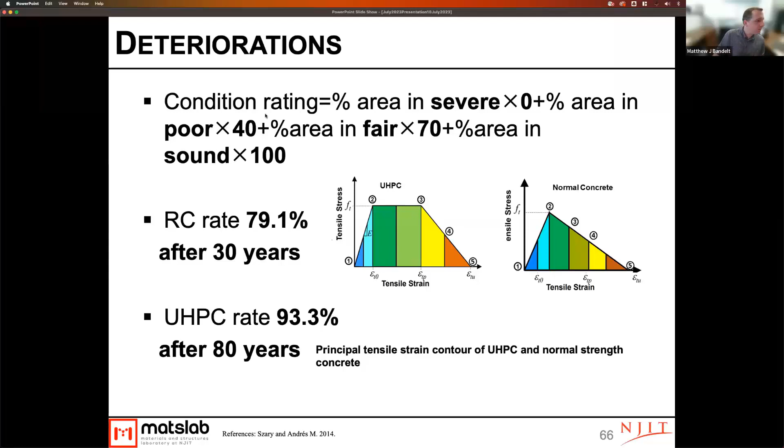Do you guys have any experience in HPIC and how it compares to UHPC and HPC? High performance internal curing, I assume, is what Ali's referring to there. Matt, do you have any comments on internal curing?

In internal curing, I would say that it's a slightly different category than UHPC and HPC. UHPC and HPC tend to refer to a strength category that then filters down into all sorts of other aspects. The internal curing, whether it's used in HPC or UHPC, is just going to help the system. It makes sure that there's water provided to help reduce any shrinkage that does occur, whether it's from autogenous or drying shrinkage. It helps develop that microstructure and ensure that you're reaching the strength that you intend to reach.

So if you have well implemented internal curing, it essentially will make your UHPC or your HPC better. But like all things we work with in concrete, when done correctly, it should improve everything, but if it's not done correctly, it can make things drastically worse. So it would have a similar effect on both mixtures if it's done correctly, by helping to provide water to prevent closure of pores or lack of water access for curing. It should have a similar effect on both systems.

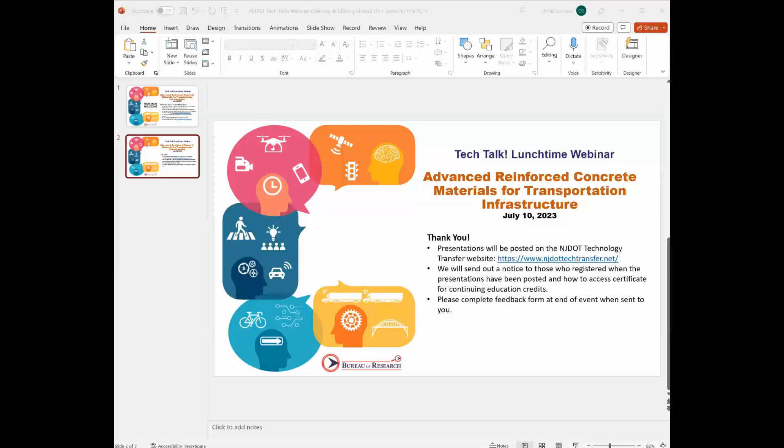Thank you. Bye-bye. Thank you, everybody. Thank you.